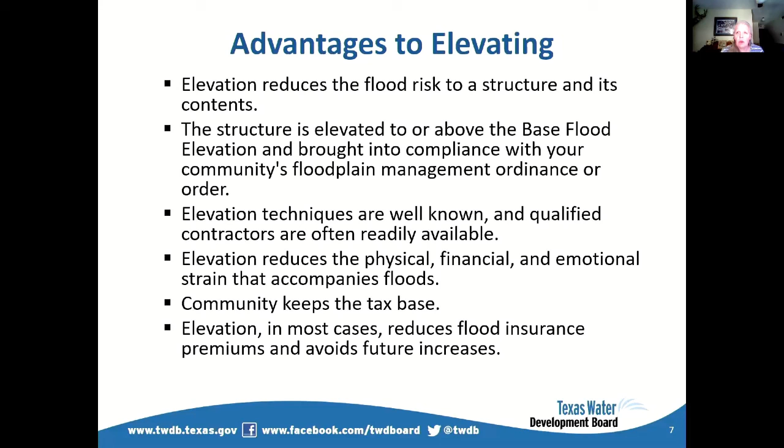It keeps the tax base within the community. Elevations in most cases will reduce your flood insurance and avoid future increases. Most of the time when somebody says, okay, I have to elevate my structure 6 feet, and then the freeboard is another foot, so I'm going up 7 feet, I talk to them and say, well, you want to go up an extra foot or so that you can have access to storage, parking, and access to your structure underneath. That extra foot sometimes makes the world of difference. So it's good to promote that.

Some of the disadvantages of elevation: the structure remains in the special flood hazard area. Even though we've hopefully raised it above where the flooding event will occur, the structure is still located in the floodplain. Another thing is the community might have to still provide emergency services during a flood event, so that has to be taken into consideration. Once we elevate the structure, the community has to monitor it to ensure it stays in compliance, meaning they're not enclosing it, because a lot of communities, at least in Texas, require 3-side enclosures. It's really easy to close that 4th side, and the next thing you know they're doing sheetrock and pouring a foundation underneath it. So one of the things is the community has to continually monitor those properties to ensure they're being maintained for access, storage, and parking below that elevated area.

So what is the elevation roadmap? First you've got to identify the available funding sources. I always turn to the Hazard Mitigation Assistance Grant Program, because that's one of the programs I administer.

The community has to determine its technical capabilities. Are they able to administer this grant program? If they're not able to administer the grant program for elevation, then they need to seek certified contractors or grant administrators to help them with that. So they need to look inside themselves. Once you find the funding, you need to also find out your capabilities - are you able to develop an application, are you able to do the administration? You would think the larger communities would be able to do all of that in-house, and the smaller communities are the ones that would need the grant administrators. But in most cases, a lot of our smaller communities are actually administering their own grants. It's the larger entities, like the City of Houston and Harris County Flood Control District, that use a lot of outside help in their administration. So across the board, it's a little bit different, but you have to find out and determine your community's technical abilities.

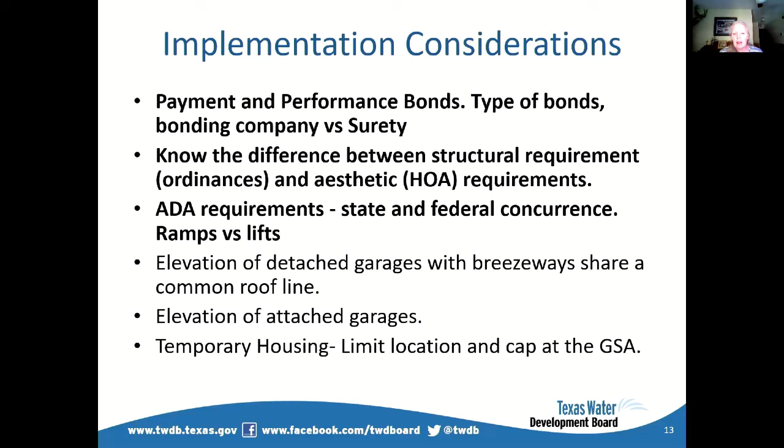I get a lot of questions about whether you can elevate a slab on grade structure. And I say, oh yeah, it's easier in some cases to elevate a slab on grade than to elevate a house that's existing on pilings or piers. So yes, elevating slab on grade is definitely doable in the state of Texas.

I really recommend you don't even allow that to occur during the elevation. Put the wooden stairs up, and if the homeowner wants to upgrade later, let them do it on their own dime and outside of the grant program, so you don't have delays. Most of the time, elevating increases the value of the structures because they're not getting that repetitive flooding.

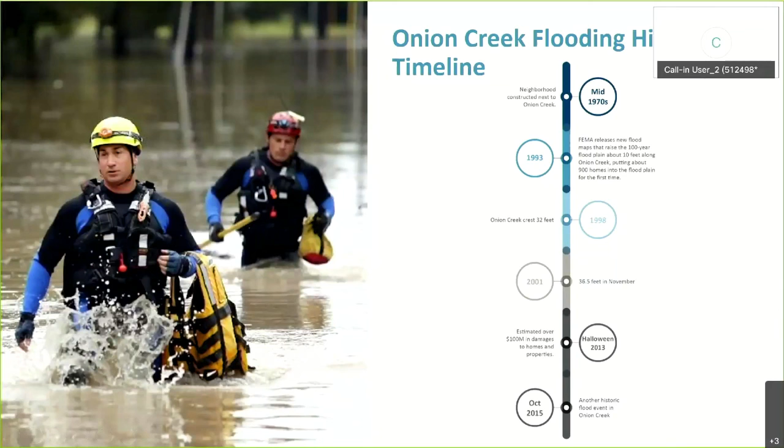And now here's a little history about the funding of the Onion Creek project. In 1998, Austin voters approved $2.4 million in bonds to buy flood-prone homes near Onion Creek. The city purchased and razed about 40 homes over the next several years. Then in 2006, the Army Corps of Engineers recommended spending $76 million to buy an additional 483 homes near Onion Creek.

This was through a federal match grant, including many already purchased properties by the city. However, Congress never approved the funding for the project, and now the cost has risen to $83.3 million.

Austin then lands a $7.8 million FEMA grant to purchase homes in the floodplain area. In November of 2006, Austin voters also approved $28 million in bonds to fund the city's portion of the Army Corps of Engineers project. The city then buys and demolishes around 114 homes near Onion Creek over the next 3 years.

Then in October of 2008, the city buys 100 more homes in the area using local taxpayer dollars, due to the record flood on Onion Creek damaging more than 500 homes in 2008, with an insured loss estimated at $30 million in Travis, Hays, and Caldwell counties. And those costs did not count damaged vehicles.

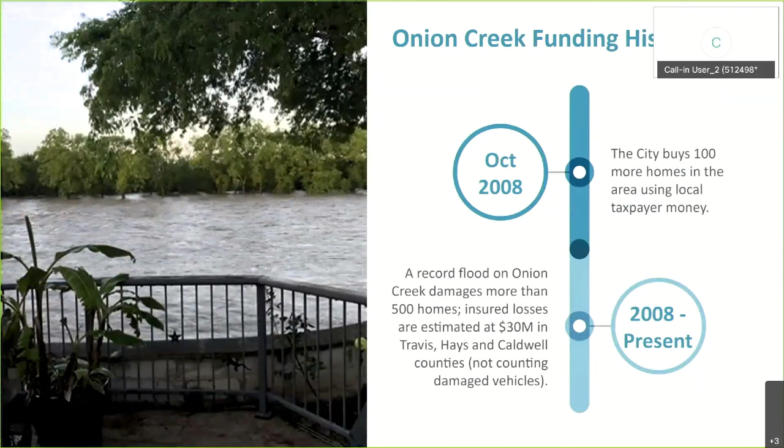I'm going to turn this over to Alex now and let him give you more information concerning how the city actually went through the process of purchasing the homes and building park area for the residents. Thank you, Terry. I'd like to go through how the City of Austin helped people and the community helped the people in the time of the crisis.

So first, we wanted to talk about the impact of the flood. Immediately after the Halloween 2013 floods, the project really grew overnight. A lot of local staff from multiple departments of the city, as well as consultants, were called in to help provide support to the expanded project and help provide relief to those individuals.

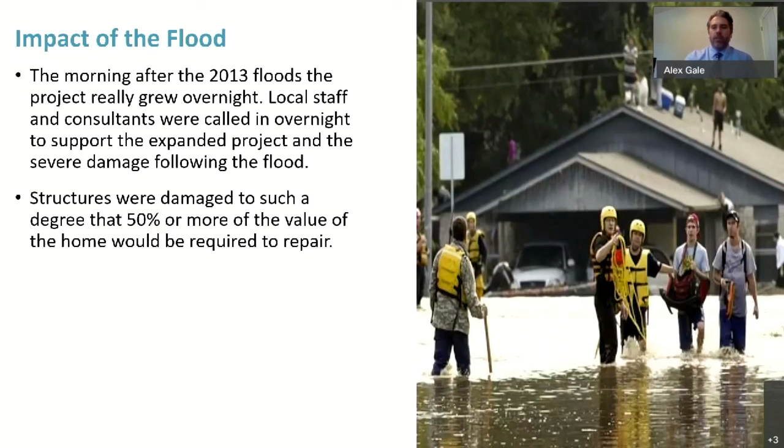There were many structures that were damaged to a degree that was 50% or more of the value of the home, which would require repair. And so those implications led to hard decisions by many of the owners to decide if they wanted to make repairs to their home.

The city did want to instill confidence. Before the 2013 flood, many in the community did not believe that the city was going to be able to move forward with the buyouts because of lack of funding. The project had been in effect essentially by the city, the buyout, since 1998. And prior to that 2013 flood, property acquisitions were down to 1 or 2 a month due to that lack of funding. So following the October 2013 flood, the city did approve in 2014 spending $20 million to offer buyouts to the 116 or more property owners in the Onion Creek area.

And then there was an impact of another flood. So once the city of Austin implemented the buyouts in 2014, another flood happened almost 2 years to the date in 2015. So the buyout project was already underway, and then again, this 2015 flood hits.

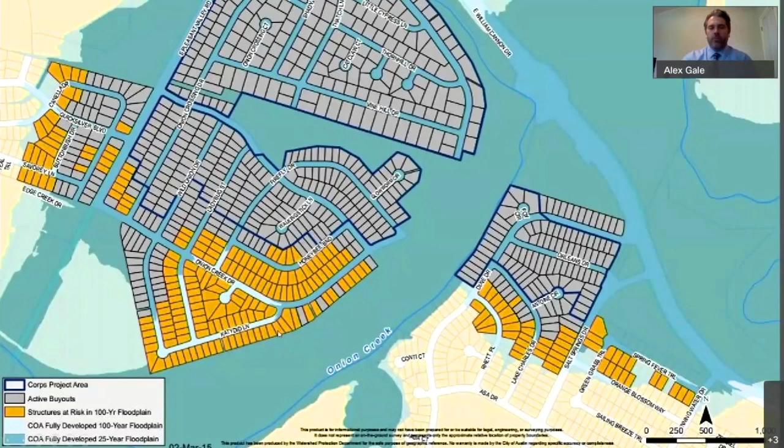This is a map of the project area. The teal color is the 25-year floodplain, and this lighter shade of green is the 100-year floodplain. The properties in gray, bordered by dark blue, are the properties that were in the initial U.S. Army Corps of Engineers area. The properties in gray were those deemed part of the 25-year floodplain, and the properties in orange were those structures and properties at risk in the 100-year floodplain.

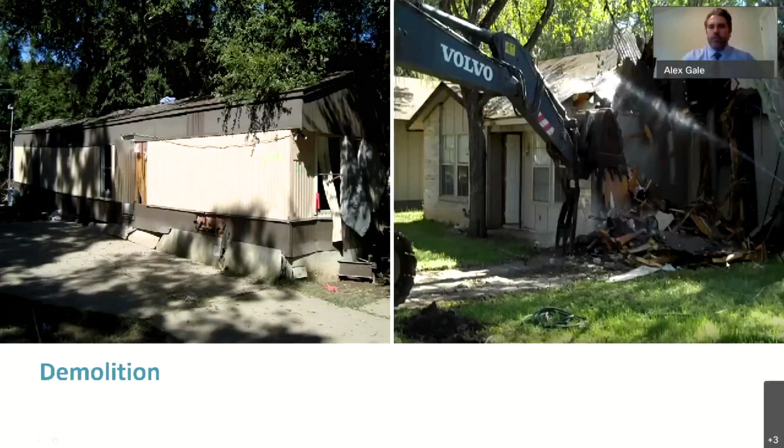In doing the buyout program, other things have to be taken into consideration, such as the demolition. Here's a few pictures showing the demolition of the properties, and there was a mix of mobile homes as well as single-family stick-built homes. All things had to be taken into consideration, whether it was federally funded or locally funded, of the mold and asbestos remediation, as well as air monitoring, to ensure none of those particulates are released into the air during the demolition.

U.S. Army Corps of Engineers provided $73.2 million total for the acquisition, and we were able to acquire 483 properties at a federal cost share with U.S. Army Corps of Engineers. Once the additional floods hit in 2013 and 2015, the city council made the decision to provide additional funds. There was $95.5 million in certificates of obligation that was able to acquire 343 properties in the 25 and 100-year floodplain. Then FEMA, we were able to get a FEMA grant to secure an additional $1.5 million to purchase an additional 9 properties from the buyout area.

What we wanted to do is ensure when we're buying these properties, what was the city going to do with the space once that property was acquired. Early on, the conversations were being had of making this open space. As things progressed, there was a survey done in 2019, and even prior to that, to get an understanding of what the community would like to see in the area.

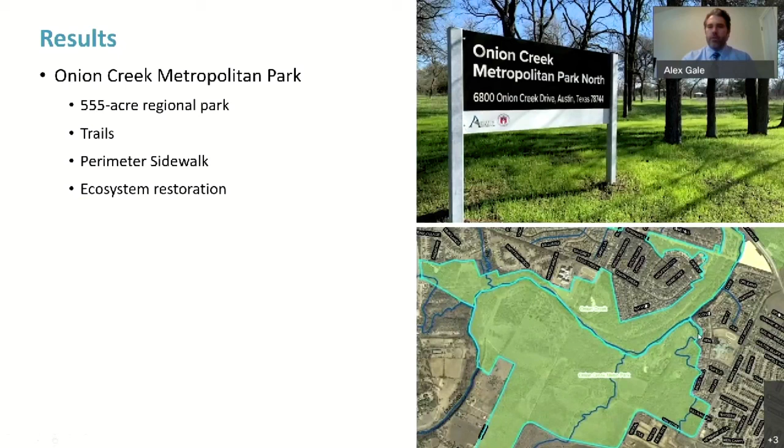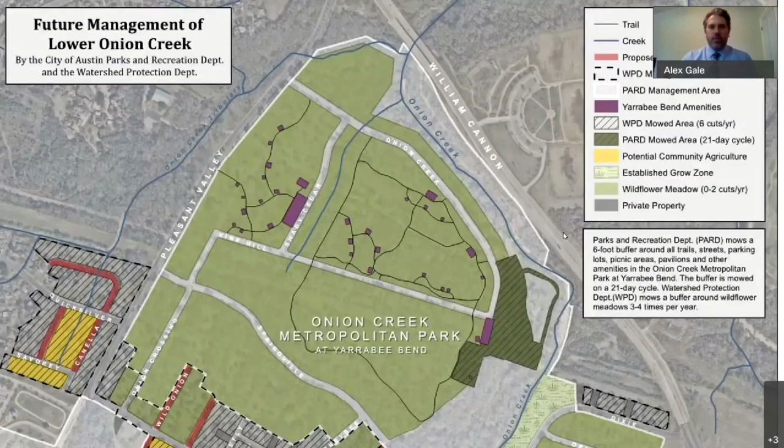Okay, thanks for that presentation. We did have a few questions come in for you guys. The first one is, Austin has very high housing costs and the photos look like there were minority, elderly, and LMI populations.

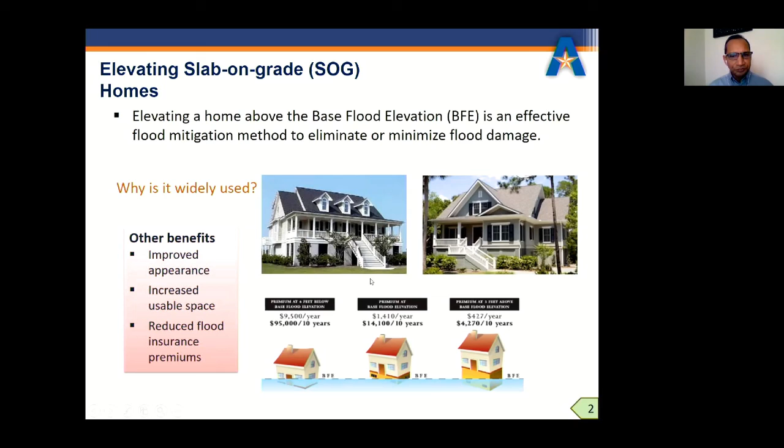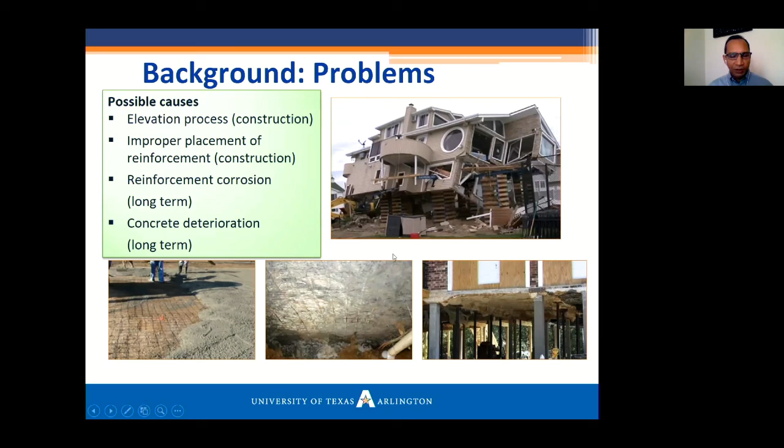The concrete deteriorates over time, the steel is rusted, and sometimes during the elevation process, the structure may fall on the side. So once that happens, you lose the contents, maybe some of it or most of it. The structure has to be rebuilt. It's an expensive process, and if it really happens more in the future, then there could be chance of injury or even death of the occupants.

So during Harvey or post-Harvey, there's a lot of awareness of elevations of structures. People are aware of it. There's a push to elevate more and more structures. There is funding available for that. And there are signboards. I've seen some in the Houston area after Harvey, that elevation is something to be done.

So the question now is not whether elevation should be done or not. Elevation should be done. The question is how to do it safely, the process and the engineering aspect of it, so that we save money and we save the occupants from experiencing casualties, for example.

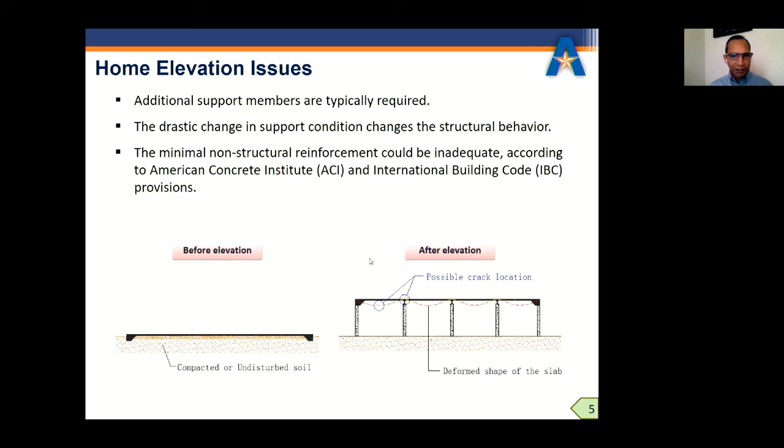And if we are not careful, then the slab may collapse, the home may collapse, and there could be unintended consequences from that. So to address this, I came up with this idea to do a pilot project at UT Arlington. I think it started in 2016 and ended in 2018. What we looked at is how to make the slab safer, and we have some preliminary results. What we did, we built physically 2 slabs.

These are 20 feet by 16 feet, mimicking the practical situation. This is a 4-inch slab, and the concrete was about 2,500 psi, typical field condition. So we put the OSB formwork, and then we put the wire mesh on the bottom to mimic the field condition as you saw in the photograph. Then we used ready-mix concrete to make up these slabs. We cured them for 28 days.

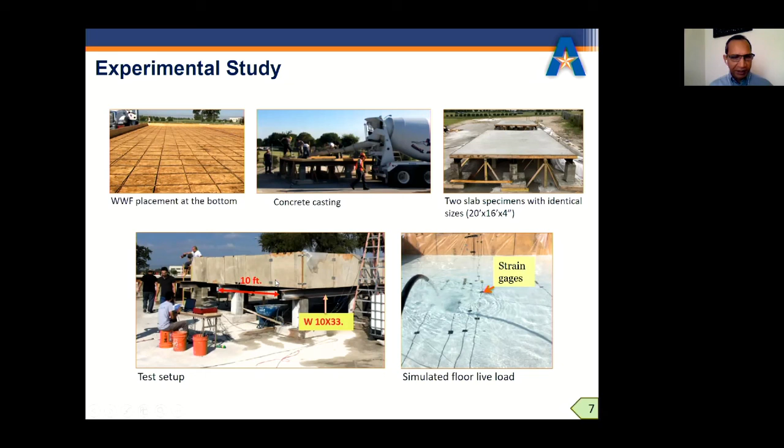And we also built a trough of OSB on the sides. So we had an innovative way, an easy way to apply the load on the floor. As you know, the slab should have live load on it, the floor load. So we gradually applied water with the hose. And as the water height went up in the trough, the simulated live load on the floor would increase. And there'll be a time when the slab will fail. We instrumented that with strain gauges, deflection meters, and we collected the data in a computer and then post-processed the data.

So here are the results from one of the slabs, which is a regular slab, no retrofitting, no strengthening. As expected, there's a crack on the top at the weak line on the support. The crack extended to the bottom. We know that because the water is leaking. I can see that here. And then the crack along the positive moment at the mid-span region at the bottom of the slab, as expected.

So what happened as we increased the water load, at about 18 inches of water, the slab suddenly collapsed. There was no warning. It was a very brittle failure, expected of a plain concrete slab, a weak slab. And this amounts to about 94 psf for floor live load, which, if you consider the dead load from the self-weight of the slab itself, is below what the IBC requires for a residential home to have, the minimum capacity on the floor. You can see clearly the failure line.

And if this happens in a real life structure, there'll be no warning at all. There'll be no deflection, no sagging, no cracking, no spalling. There'll be some cracking which may be hidden, and there'll be no warning at all. A ductile structure, as opposed to that, would give occupants warning. There'll be sagging, maybe cracking on the ceramic tiles, so that people can take evasive action. The structure could be saved by repair or retrofit, but that simply didn't happen in this case, which is a very worrisome thing for the occupants.

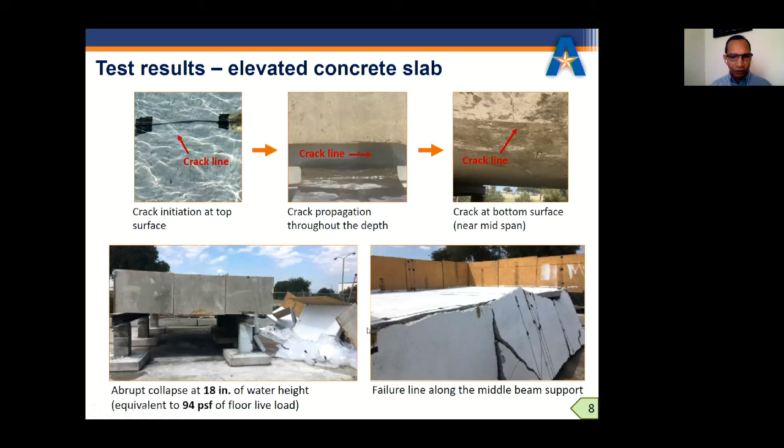So there's an innovative approach we are considering, which is conceptual at this time. It might be practical with some issues to be resolved. First of all, we sandblasted the surface. This is the second slab, the one that didn't fail yet. We have to do sandblasting so that we can apply this carbon fiber wrap. It comes in a spool, about 3 feet wide. Some of you may be familiar with that. It has been used extensively for building retrofit, bridge retrofit, and other cases.

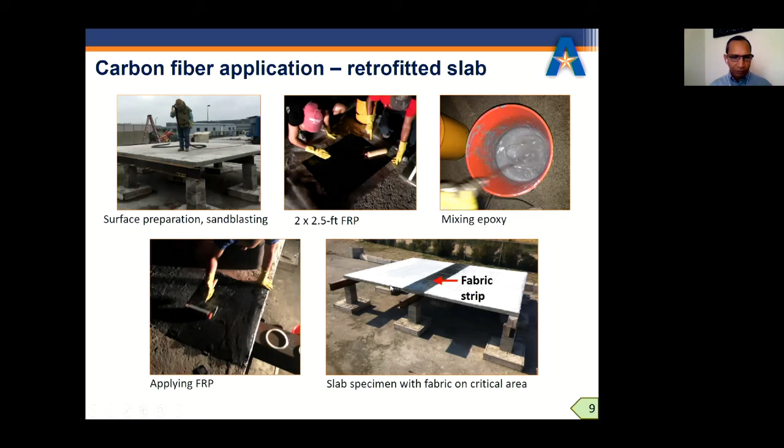So we just applied it on top of the slab at the expected weak point, if you remember, on the support. So the way to do that is the fabric, and then we apply the epoxy glue on both surfaces of the fabric. And then the epoxy is applied on the top of the concrete. And then it's a simple matter of just putting it there, making sure there is no air pocket underneath the fabric. This could be applied on the top or bottom of the concrete slab to increase the strength and ductility.

So after that, we tested it again under the same water load as I explained before. This time, surprise, we could increase the load to 28 inches of water, which is almost twice the 18 inches that we saw for the slab without any strengthening. And this is equivalent to 146 PSF of floor live load, which exceeds quite a bit the IBC requirement.

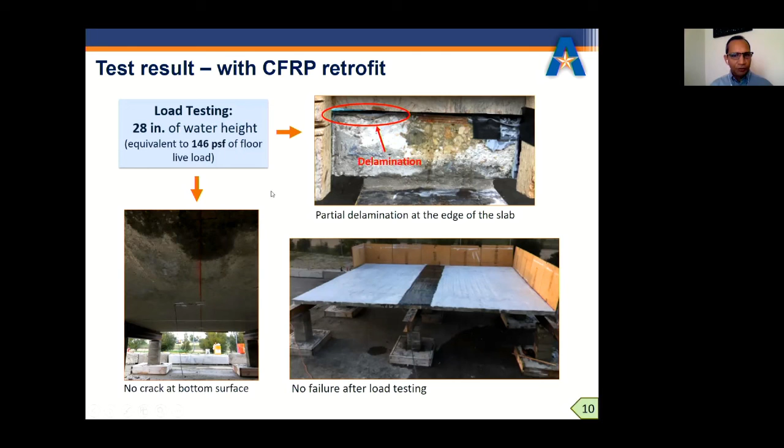If you remember, see here, there's no cracking on the bottom, which we saw in the previous slab. There's no water leakage, and the slab stood up nicely. Only reason we couldn't apply more load is we exceeded that trough height, which we couldn't exceed because the trough would start buckling sideways. But we achieved our objective of showing that the slab works as intended.

Then, to extend the results, we did a computer model. What it does, it simulates the real life behavior. We use the Abaqus finite element software, which is essentially simulating the real life environment. We simulate the concrete slab, the beam, the pier, and the fabric. And this is the welded wire mesh inside that concrete, nicely shown here. And at the end, the program showed the cracking that happened on the support as we thought it should happen, as we saw in the experiment.

So what's the advantage of the program? Well, now we can play with the parameters. We can increase the beam span. We can increase the spacing between the supports. We can vary the slab thickness. We can vary the concrete strength. And also we can try different kinds of fabrics to see the end result. Doing this experimentally is simply impossible because the experiment costs a lot of money, but the computer program is cheap and we already have the program at the university.

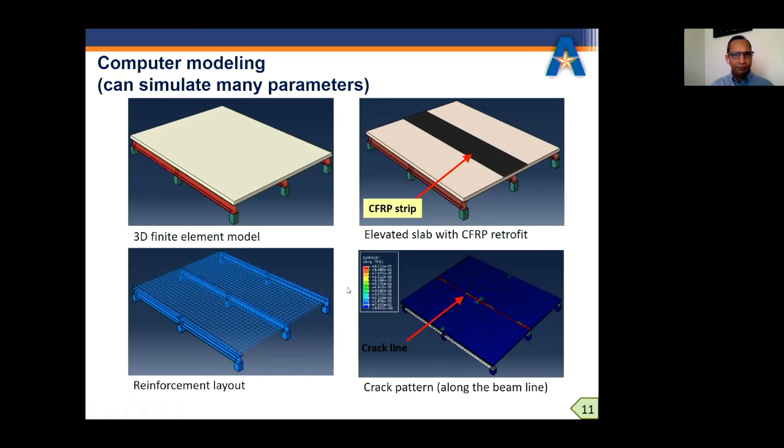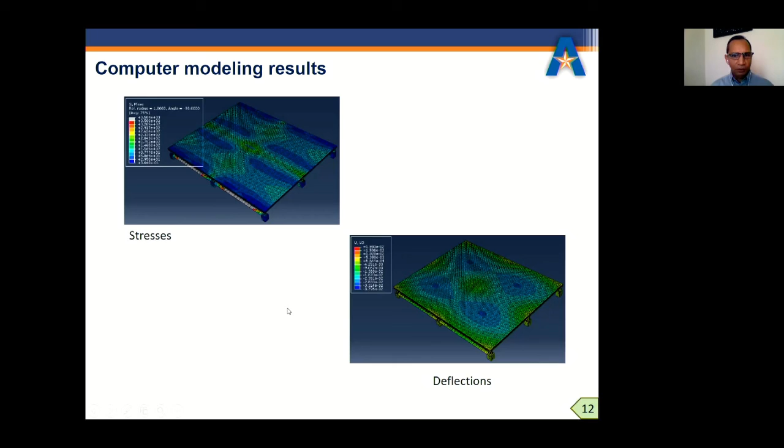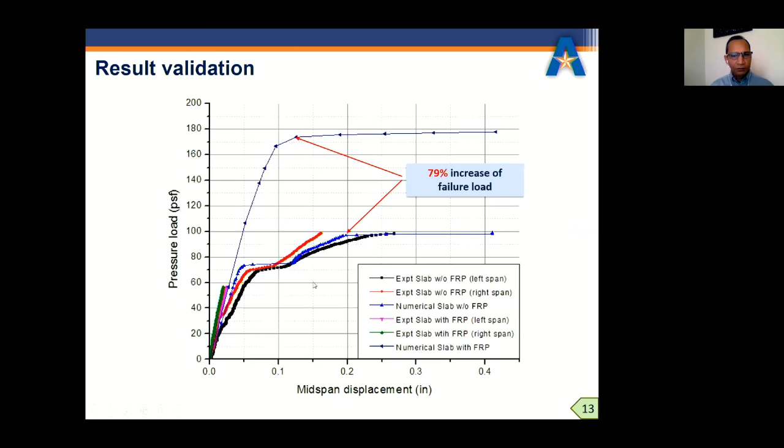So we still need to look at the variables, which we look at in the Texas Sea Grant project. So variables of the concrete strength. Do we have support beams or not? What is the spacing between piers? And the slab thickness, among others. And other things could be, when you connect the slab to the support, what type of connection do we have, the size of the support beam, and also the effect of the grade beam. We didn't do that in the preliminary study. Does it stiffen the slab enough to give it more strength? We need to study that as well.

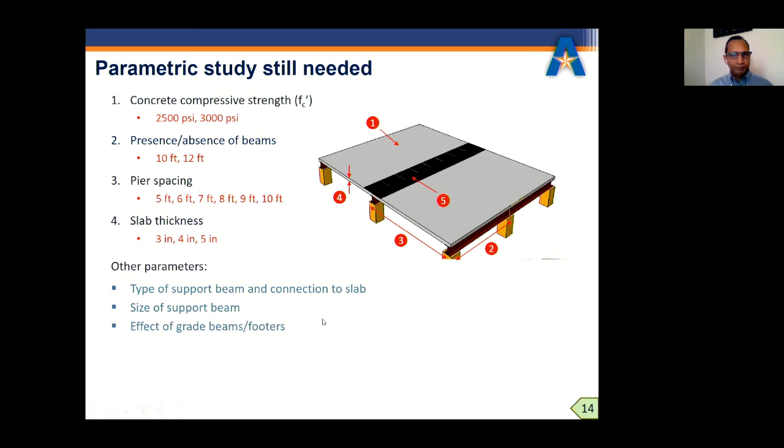So the Texas Sea Grant project is very involved. It's a 2-year project. It's a collaborative effort. I'll explain that a little bit later on. So we have an advisory board. We look at the Harvey affected communities. We'll do more investigation experimentally. A big thing about this project is the development of a decision software. So after we get everything done, we're gonna develop a very nice tool where users can input simple data and then figure out the safety of the slab.

So the target audience are the elevation contractors, engineers, homeowners, local, state, and federal officials. And then we're going to have quite a bit of outreach. I'll explain that later on in the presentation.

It's a truly collaborative effort, as I explained. I'm very happy and proud to be part of this collaborative team. Myself from UT Arlington, I'm the principal investigator, and my students from UT Arlington. Dr. Kaliu from TAMU is the co-investigator with me, and she will have a graduate student involved. We also have several local governments, elevation contractors, and coastal engineers involved.

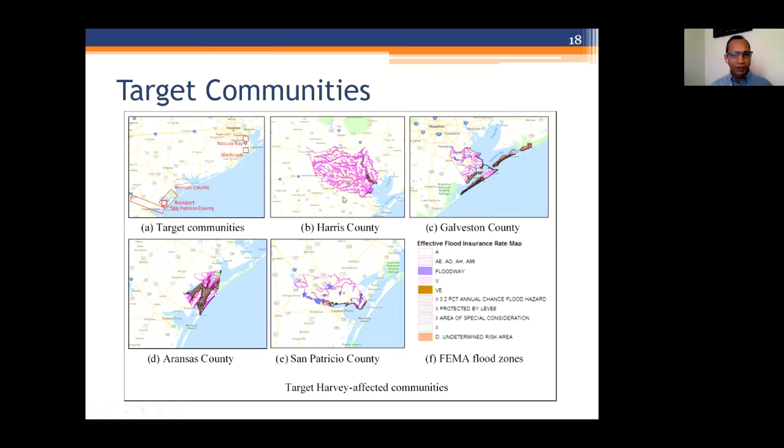So the target communities, of course, are Harvey affected communities, and there's quite a bit in Texas, goes along the coast of Texas. Some of the communities had flood damage, but some had more wind damage than flood damage. We will look at the smaller communities where it's easier to get data, for example Aransas County, San Patricio County, and then if we can, maybe Galveston County, and parts of Harris County, for example Nassau Bay, to see whether we can get some data from there. So we will need to show the application in these communities.

So we will be doing 6 more slabs, investigated experimentally. If you remember, we did 2 slabs before. Now we're going to extend that experimental scope, looking at variables such as support pier span, pier spacing, and so forth. This will allow us to get more confidence in the parametric study for the finite element program and make it more viable. The process will be very similar, using water load on the slabs and then testing them until failure.

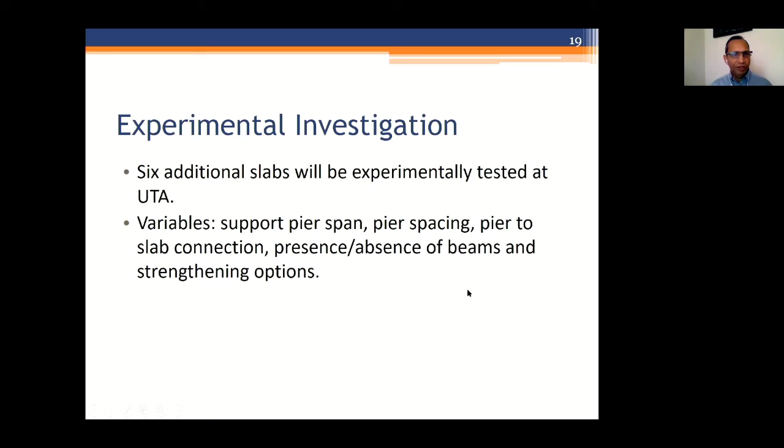Dr. Kaliu at TAMU will do the computer validation, which is essentially using Abaqus and extending with a parametric study that also mimics the pilot study we did at UTA. One thing we'll do now is add wind load to the structure. The previous study looked only at vertical load, but an elevated structure may have more wind load applied, so how does it affect the slab behavior? We'll study that, and it will be validated with experimental results from UTA.

So I mentioned the web tool. This is an exciting part of this project. We're going to use either Visual Basic and/or Excel, web-based. We're going to develop a mobile phone version of it and also a PC version. It will be done at a layman's level so that highly technical expertise will not be necessary. Things like, do you know the concrete strength or the slab thickness? If not, we're going to use default values, which is typically 4-inch and 3000 PSI.

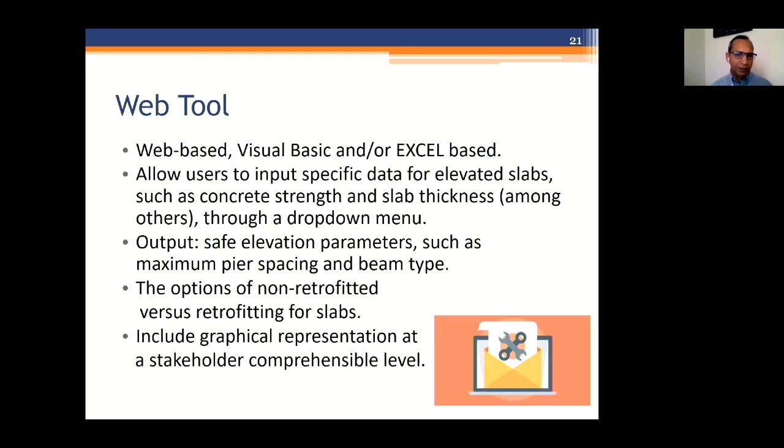Then the important thing would be the dimension of the slab. And if the slab support is already known, the kind of pier and the spacing could be input. So the output will be whether the elevation process or the parameters are safe. Vice versa, if only the slab parameters are input, then we could suggest safe elevation parameters, for example the beam type and the support spacing and so forth. Then if somebody wants to retrofit to increase the strength, in case the slab is weak, we can suggest retrofit options, for example carbon fiber and others if feasible.

So after that, we'll be helping the elevation contractors on 2 real-life elevation projects. We hope to find 2 of them in the communities that we are partnering with. We'll be working with the homeowner, the contractor, and local officials. We're going to apply the tool we developed and figure out how easy it is to use, and maybe improve that based on input from the stakeholders, elevate the structure, and look at the convenience and efficiency of the software. Then we're going to tweak the software at the end as needed.